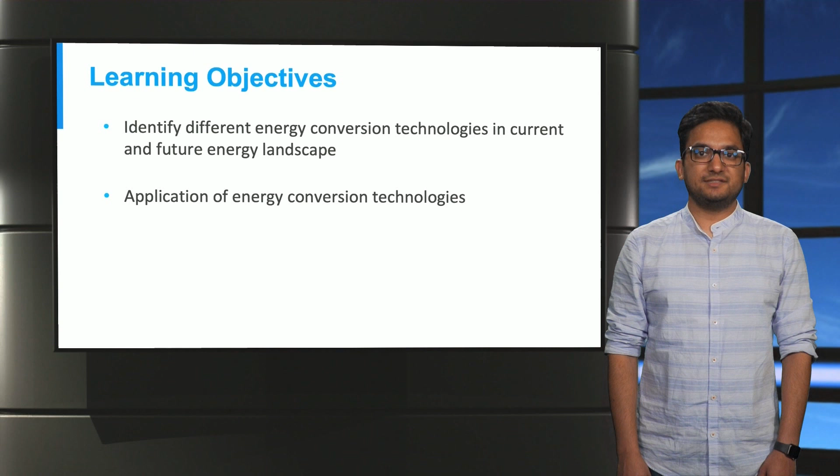In this lecture, we will look at the existing energy conversion technologies which include power to gas, fuel cells, power to heat, and combined heat and power. All these technologies are explored to present a broad overview of their role in coupling the energy systems.

Let us start with power to gas systems. Power to gas technology, or P2G technology, has recently emerged as a go-to option in the energy transition equation. At its core, P2G works by converting electrical power into gaseous fuels. Most P2G systems use electrolysis of water to produce hydrogen. However, other systems which produce gaseous fuels such as methane or syngas using electricity are also being developed.

Electrolysis is mainly of three types: alkaline, proton exchange membrane or PEM, and solid oxide cell or SOC electrolysis.

Alkaline electrolysis has been around the longest, with capacities up to 100 megawatts being used in industrial setups. The technological readiness level, or TRL, for alkaline electrolysis is 9, implying that it is a fully mature technology in deployment.

The PEM electrolysis has recently gained a lot of traction for its high efficiency and stability. Currently, the largest available PEM electrolyzers are less than 10 megawatts in size, but are quickly approaching the scale of alkaline electrolyzers. The TRL for PEM electrolyzers is between 8 and 9.

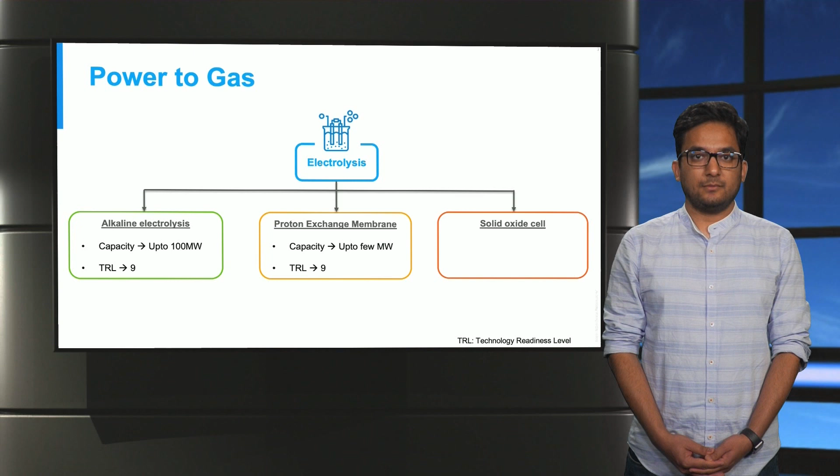Lastly, we have the solid oxide cells, which are still in prototype and development phase, hence the TRL of 5. The SOC electrolyzers have higher energy efficiency and power density compared to PEM and alkaline electrolyzers, allowing for smaller and compact system design.

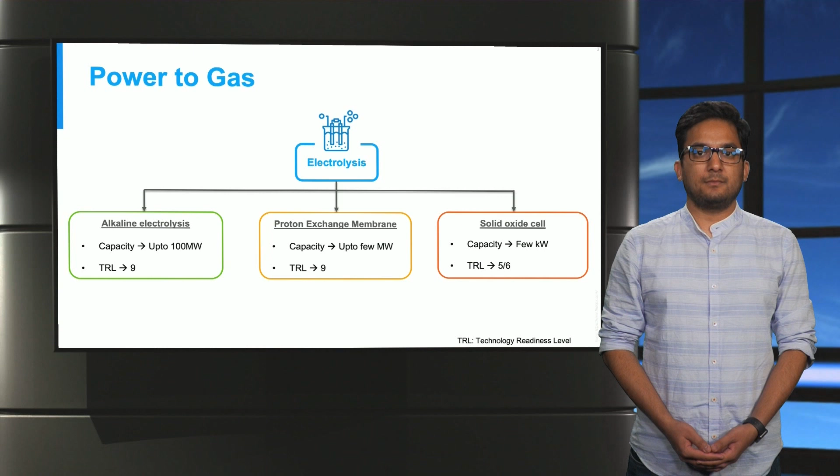Apart from producing gaseous fuels and chemicals, P2G has other operational advantages as well. All three mentioned technologies have extremely fast power response. Thus, it can help the power system respond to changes in real-time power balance, thereby helping in maintaining frequency of the power system and ensuring its stability.

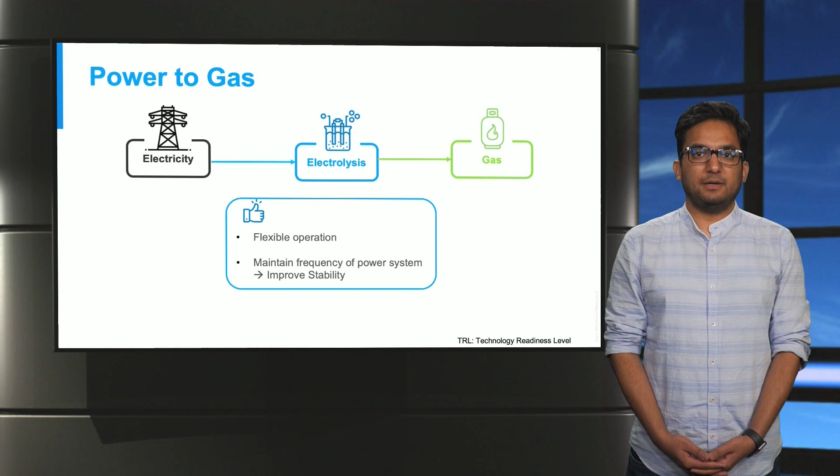While power to gas converts electricity into gaseous fuels, fuel cells do exactly the opposite by converting gaseous fuels such as hydrogen and oxygen into electricity.

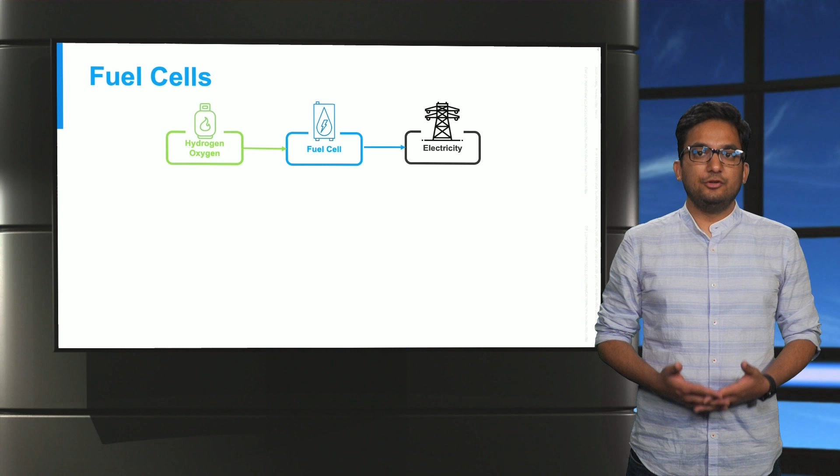Fuel cells were developed in the 1830s but found their use in critical power supply in mid-1960s when the National Aeronautics and Space Administration, or NASA, started using them to power satellites and space capsules.

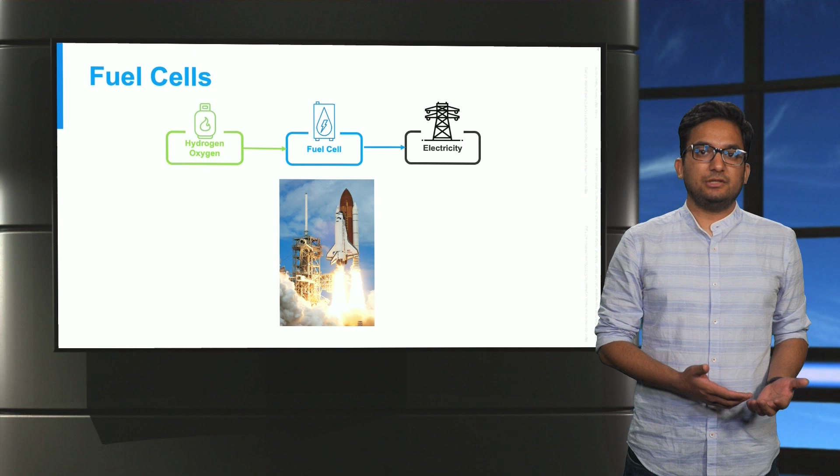Fuel cells work by converting chemical energy into electrical energy. At the anode, the hydrogen is oxidized, which generates positively charged hydrogen ions and electrons. These travel to the cathode via the electrolyte medium, while at the same time electrons move from anode to cathode via the external circuit, producing direct current.

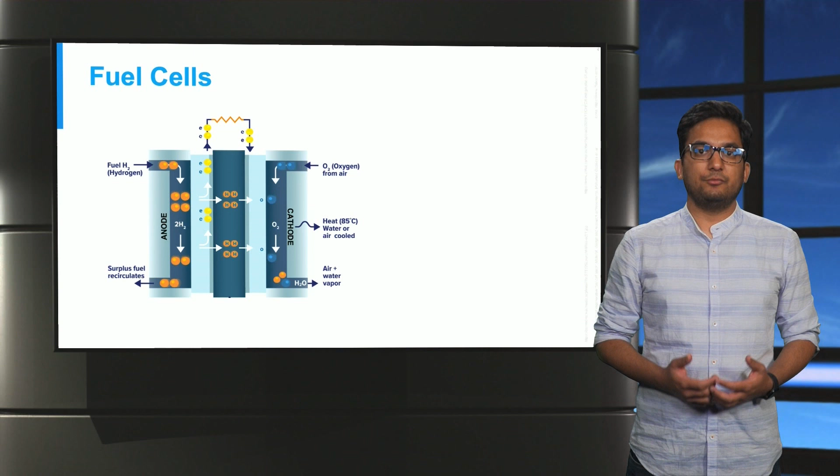In large fuel cells, these smaller cells are stacked together so that the amount of current and consequently the power produced is significant. The largest fuel cell at the moment of recording this lecture is installed in South Korea with a capacity of 59 megawatts.

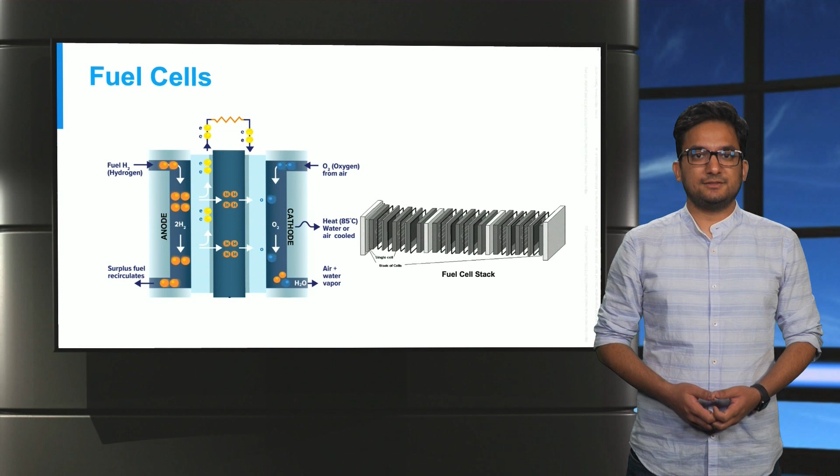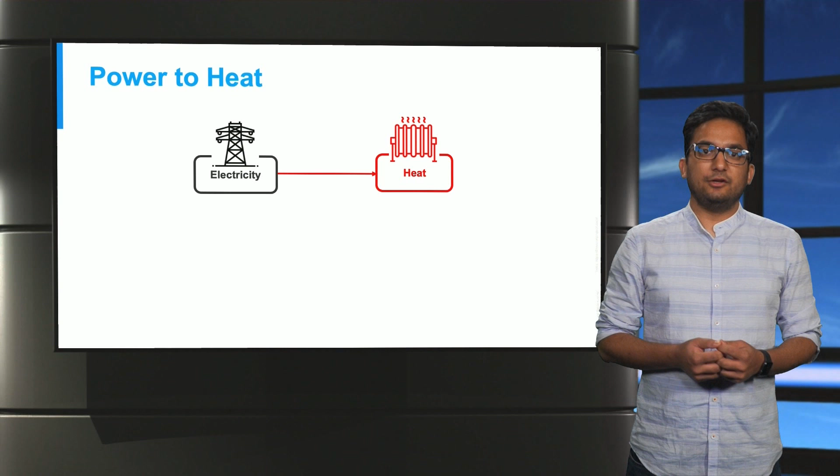The International Energy Agency, in its 2018 report, explained that although heat accounted for half of global energy consumption, only 10% was produced using modern renewable energy. The power to heat technology could be used to convert electricity into renewable heat. This heat can be for residential, commercial, or industrial use in the form of either hot water or steam.

Power to heat is achieved either through electric boilers or electric heat pumps, both of which are highly efficient technologies. The boilers are simple in operation and can be based on either electric resistive heating or a combination of both gas and electricity. Both boiler systems are more efficient than gas boilers since using electric resistive heating is a 100% efficient process.

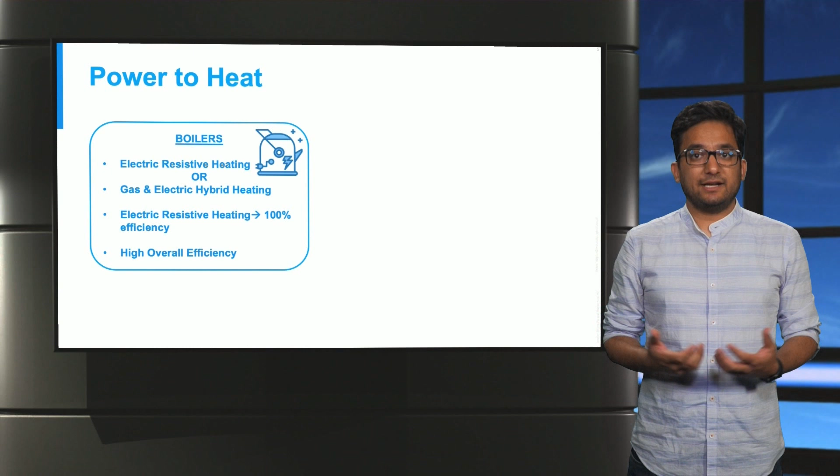Electric heat pumps can be air, ground, or water source heat pumps. Here, the term source refers to the medium used for heat exchange.

Heat pump performance is measured with a variable called coefficient of performance, or COP. COP is the ratio of useful heat, or cold, provided to the energy input. Consider this figure: a heat pump is a device that transfers heat energy from a heat source to a heat sink, but in this case, the transfer occurs in the opposite direction of normal heat transfer.

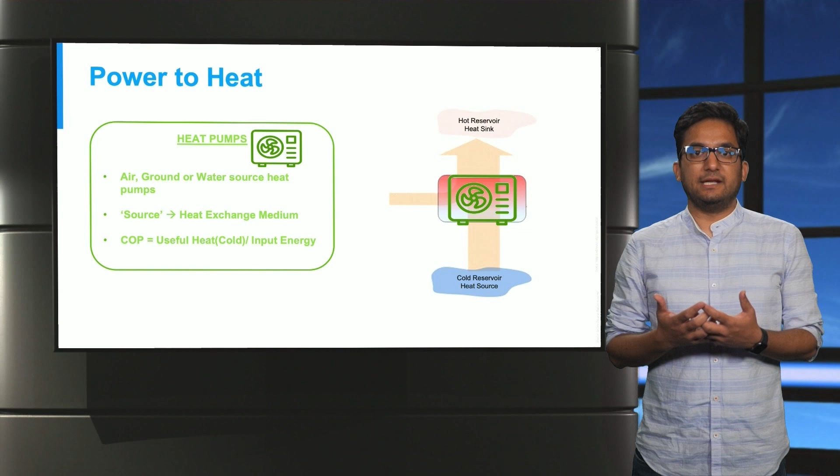The heat pump absorbs heat from a cold space, shown as QC, and uses electrical power, W pump, to transfer this heat to a warmer space, shown as QH. The COP of a heat pump is therefore the ratio of QH to W, where QH is the sum of QC and W. Therefore, the COP for heating is always greater than 1. In actual applications, the COP ranges from 2 to 6.

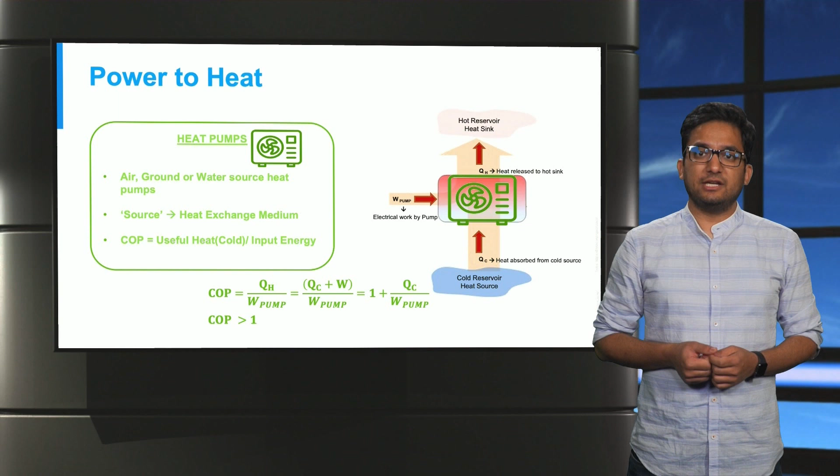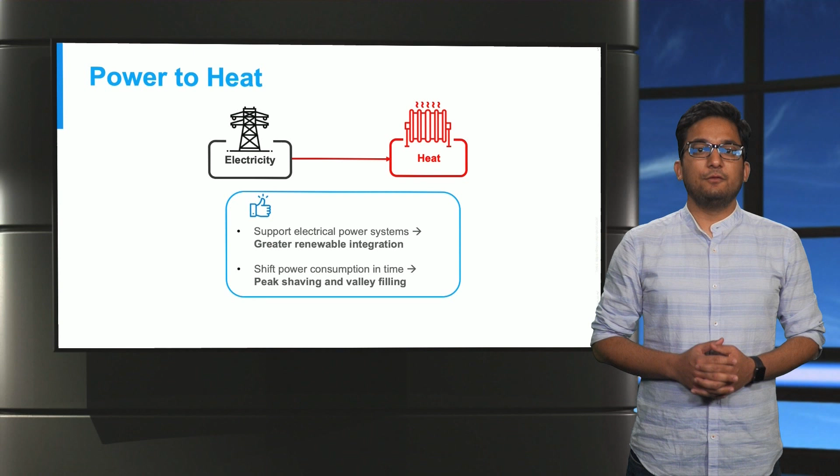Power-to-heat systems can also be used to support electrical power systems and help integrate a greater share of renewable energy into the grid. However, unlike power-to-gas systems, which are highly effective at providing frequency regulation, power-to-heat systems are excellent at shifting their power consumption in time, making them excellent candidates for peak shaving and valley filling purposes.

Till now, we have looked at technologies which use fuel and produce either gas or electricity or heat. Let us look at a technology that converts one fuel into two energy forms. This is known as cogeneration, or combined heat and power, or CHP for short. It converts fuel, typically natural gas or biofuel, to heat and electricity.

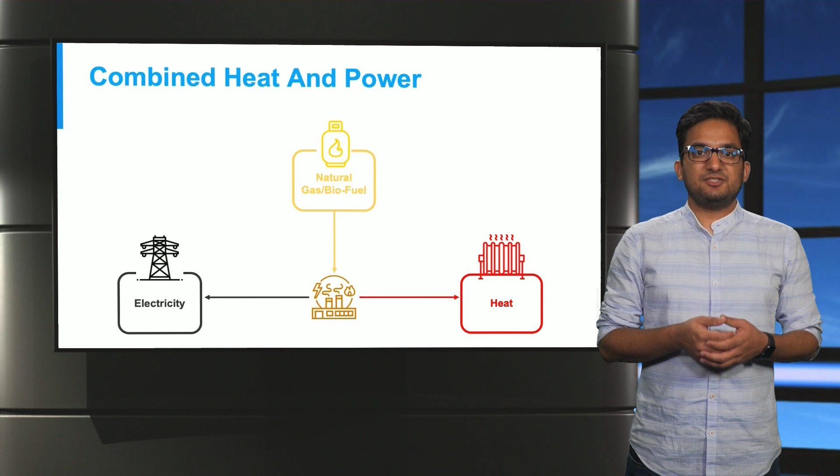CHPs have a primary objective, which is either to produce electricity or heat. If the primary objective is to produce electricity, then waste heat from the electricity generation process is recycled to serve a thermal demand. Alternatively, if the primary objective of the CHP is to serve a heat demand, whether it is hot water for district heating or high pressure steam for industrial process, then waste heat is used to generate electricity.

In either case, since the CHP uses its waste heat, it is a very efficient process, and this is one of the primary reasons that CHP technology is prevalent around the world. CHP capacities can range from 30 kilowatts to 300 megawatts, although there are some even larger plants in operation. One of the largest CHP installations is in Sweden, where the CHP plant produces 130 megawatts of electricity and 280 megawatts of thermal power.

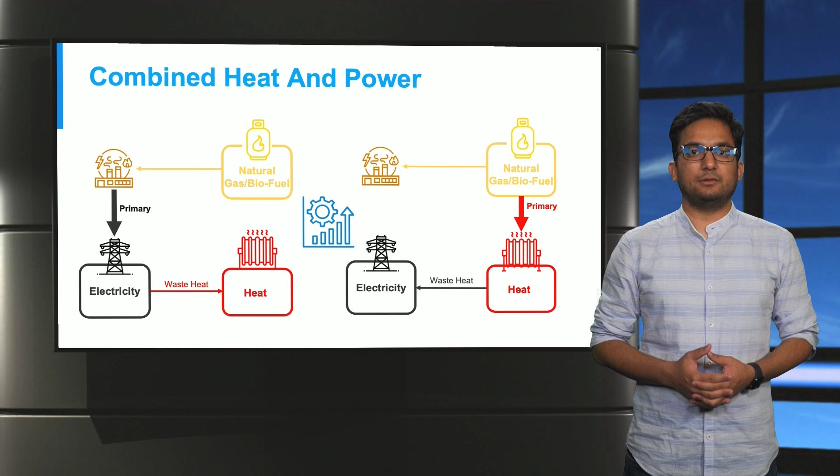Gas turbine CHPs can quickly start up and produce power, and hence are used extensively as peak power plant generators. This means that at times when the power system needs quick production of electricity to supply a peak demand, these generators can be called upon at a moment's notice to contribute. Their ability to quickly ramp up the electricity output can be used by system operators to maintain the supply and demand balance and keep the power system stable.

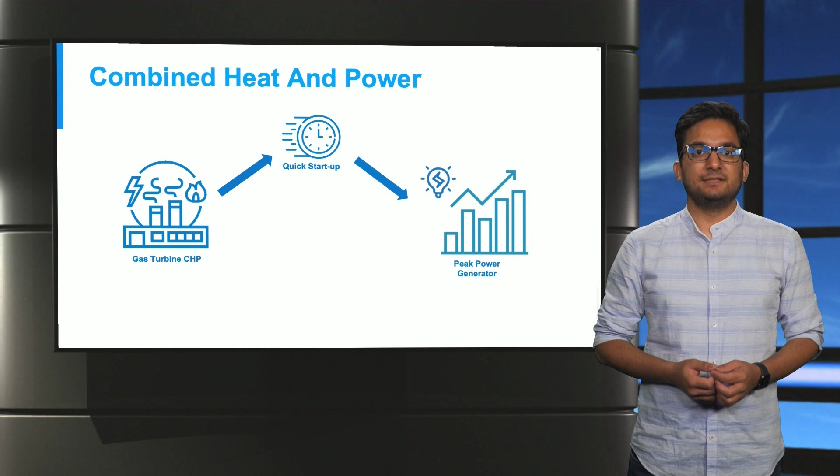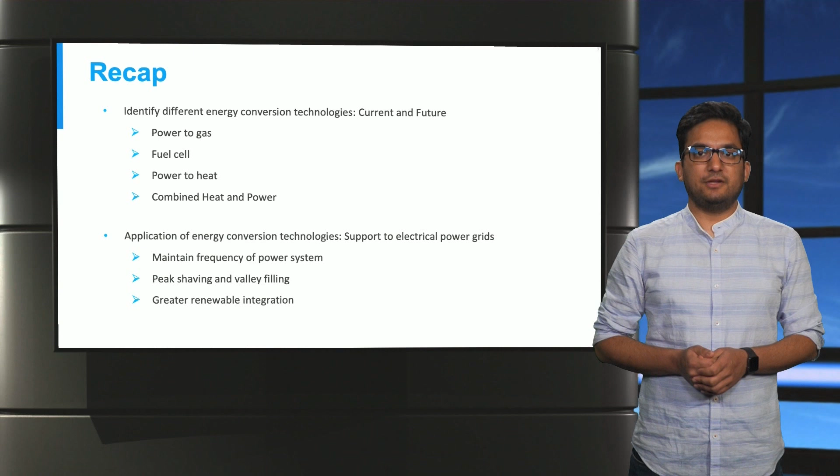To recap, we looked at various energy conversion technologies such as power to gas, fuel cells, power to heat, and combined heat and power. We looked at individual capacities of these technologies, their potential, and how they could be beneficial to an integrated energy system of the future. We also covered the application of these technologies in supporting the electrical power grid, specifically frequency support and peak load shifting. Thank you for watching and see you next time.